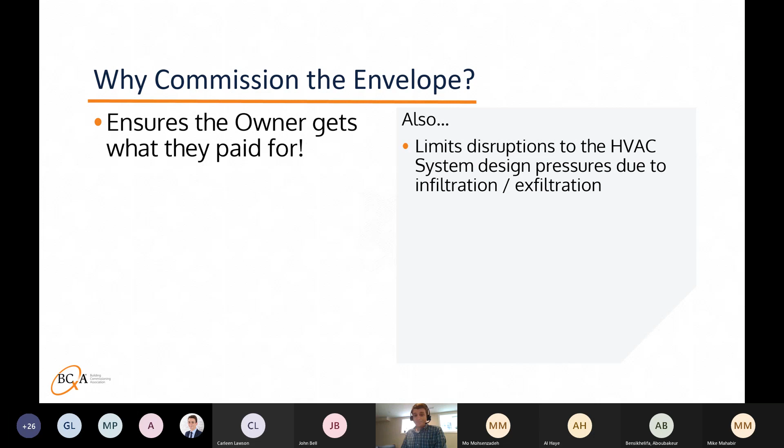Other considerations: if we have a leaky building, it's going to disrupt the HVAC system and their design air pressure relationships. This can be really serious in sensitive applications like hospitals, and even in regular buildings it's problematic. It can lead to condensation, indoor air quality problems, rot of system components, or premature failure. So it's really important to make sure we're getting a tight building, or at least one constructed to the tightness specified for that application.

It can really affect potential energy savings. If your building is leaking significantly more than you planned for, you're going to have to condition a lot more air. This can account for as much as 40% of your target energy savings on a project being affected by a poorly commissioned envelope.

Commissioning limits risks associated with construction defects, and it's important to note this is both for the owner and the contractor. With envelope systems, a lot of our defects relate to concealed components such as insulation or the air barrier. So if you're not catching those until the end of the project, it can be incredibly costly to go back and correct it. From an owner's perspective, it makes sense to catch these up front and make sure they get fixed.

And finally, really where we're seeing a lot of growth in building envelope is because it's a way to earn credits under LEED, specifically LEED version 4 that's been introduced over the past few years.

This is a good and bad thing, in my opinion. It's good because it really shines a spotlight on this area of benefit for a project. It can be bad too, because when people think about LEED, they're often thinking about the minimum amount of effort needed to get those 2 points they can achieve, and not always thinking about how to implement the best possible commissioning process.

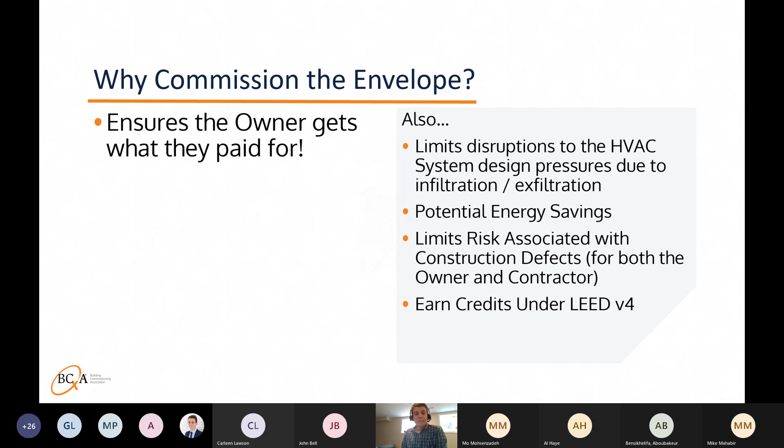When we talk about the process, one thing we want to think about is the best way to achieve these goals and save valuable time and money during construction. What we really want to do is start commissioning the envelope as early as possible. If we start late, the process can still assist with identifying and correcting mistakes via mock-up installations or early in-situ installations and construction review on site. However, it's better to catch mistakes during design and fix them before they ever make it to constructed assemblies - this saves headaches for all parties.

In an ideal world, the building envelope commissioning consultant will be brought in during the pre-design process, while the basis of design and owner's project requirements are being developed.

Unfortunately, this doesn't happen as often as it should, but regardless of when we're brought in, we have to be flexible and ensure we support our clients' needs, even if it limits our effectiveness somewhat if we're brought in later in the process. We'll talk about that in the next few slides.

When we think about the building envelope commissioning process, it really tracks through the entire construction process. There are certain parts where we're much more involved than others. Ideally, we're brought in right at the beginning, at pre-design and design development. In practice, we're often brought in closer to when the design team is putting together construction documents.

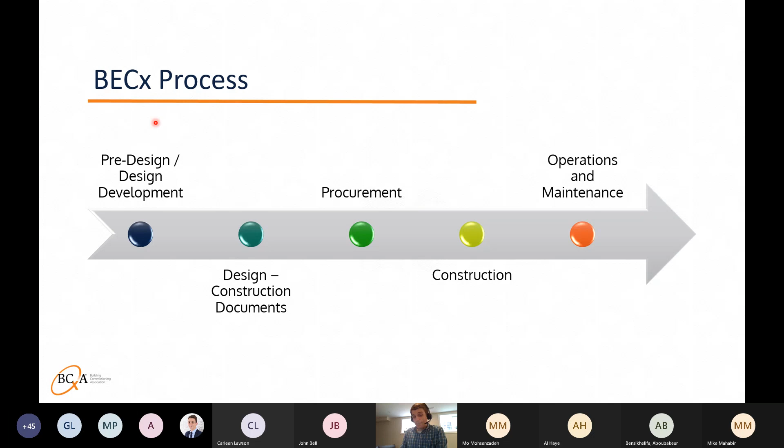We'll talk through the ideal process in the next few slides, but understanding there's a little bit of flexibility, right? As with all things in life, the ideal situation doesn't always happen. Our plan doesn't always match reality. With that said, it's easier to navigate the bumpiness of real life construction situations if we head in with a good plan and process in place, even when acknowledging we need to be flexible.

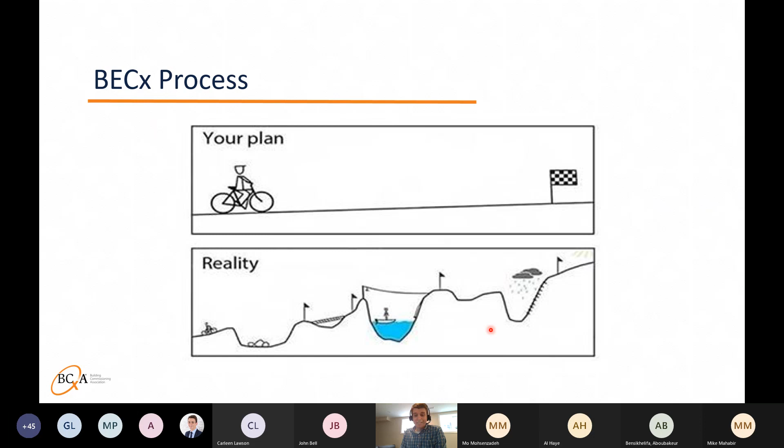Starting in pre-design and design development, the real benefit of having your building envelope commissioning team in place at this stage is it allows us to be involved in the development of the owner's project requirements.

This is a document that needs to be put in place early in the process. I'm sure you all have experience with OPR, and I'm sure you have experience with really good OPR documents and really bad OPR documents. You can have both, right?

Some of them are put in place the way they're supposed to at the beginning of the project and really inform everything else that's done. Sometimes they're retroactive documents done to check a box at the end of the job and didn't really control anything. They're just kind of put together.

But we do recommend, if at all possible, that we hold a working meeting in order to draft the OPR. Again, I'm talking specifically from an envelope perspective. Obviously there's a lot more that goes into the OPR.

This document defines requirements and specific performance targets for the project. It's important to consider budgets while putting it together. What are the owner's priorities? Do they want to meet minimum legislated requirements, or exceed them? If so, by how much? And what is the cost to do so? There are a lot of considerations to be thinking about.

It's also a living document that will be updated as the project progresses. If we identify some things during the design stage that need to be changed, we might decide that we could do this, but it's going to be significantly more expensive, or we can get similar performance if we modify it this way. So we want to have some level of flexibility in it.

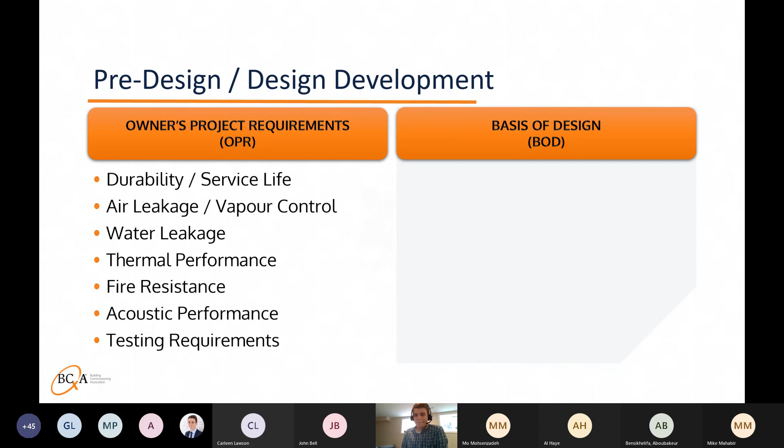Once you put your owner's project requirements together, you develop your basis of design document. This is essentially a detailed description of proposed systems, assemblies, and materials, illustrating how they can comply with the OPR. When putting together your basis of design, you want to consider maintenance requirements for the systems, especially if doing this in conjunction with life cycle costing analysis for the project.

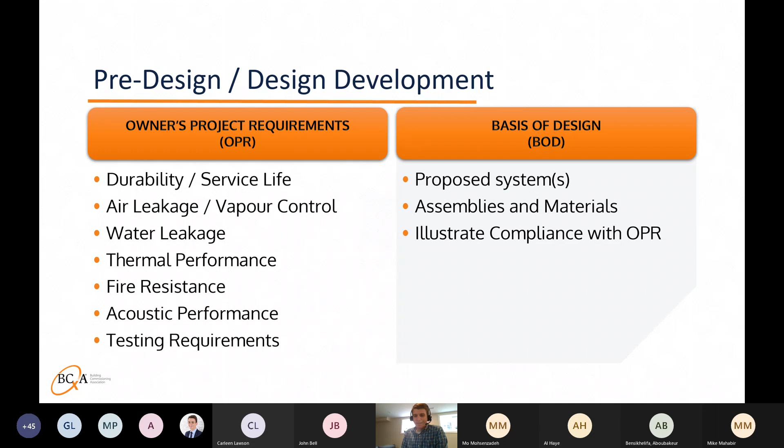In a nutshell, the OPR defines the performance targets for the building envelope, while the BOD provides the plan for how to meet these targets.

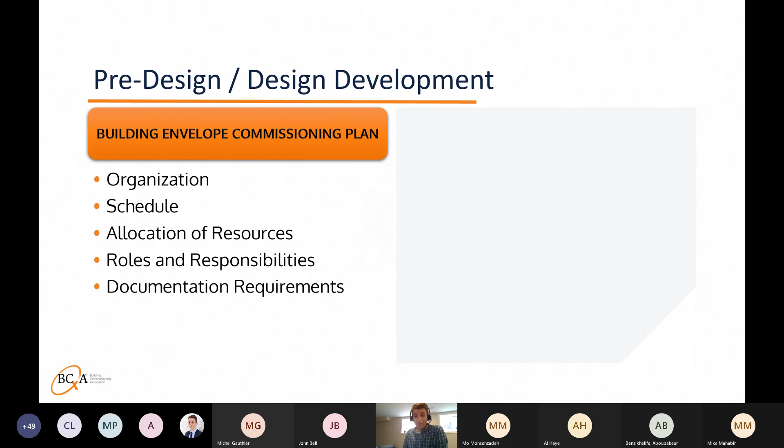Once the OPR and BOD have been developed, or in the case that we are brought in later and have reviewed and understand these documents, it's our job as the building envelope commissioning professional to create a project-specific building envelope commissioning plan that overviews the schedule and organization of commissioning activities. It should talk about how internal resources will be allocated to meet project requirements, and overview the roles and responsibilities of project team members, documentation, and documentation requirements, including who has responsibility for preparation of each document.

Okay, so that basically takes us out of the pre-design phase and brings us into design development and construction documents.

During this stage, the commissioning specification sections need to be developed. Typically we will have both front-end sections dedicated to commissioning procedures, as well as notes in the technical sections for component-specific commissioning requirements.

Typically, all of our envelope elements are covered under Division 7 and Division 8, with a few isolated exceptions.

Depending on our specific scope for a project, we may be preparing some of these specifications, or we may be in a largely review role. In either case, we need to have oversight of the specifications so that we can suggest items to be included.

Things we would want to make sure are discussed include testing requirements, shop drawing submittals, what's required for shop drawings, what's required for other material submittals, and project mock-ups for each individual assembly.

When are they required? Are they on site? Are they in factory? Are they part of the actual finished building enclosure that can be kept if the mock-up passes testing, etc.? What about manufacturer site visits?

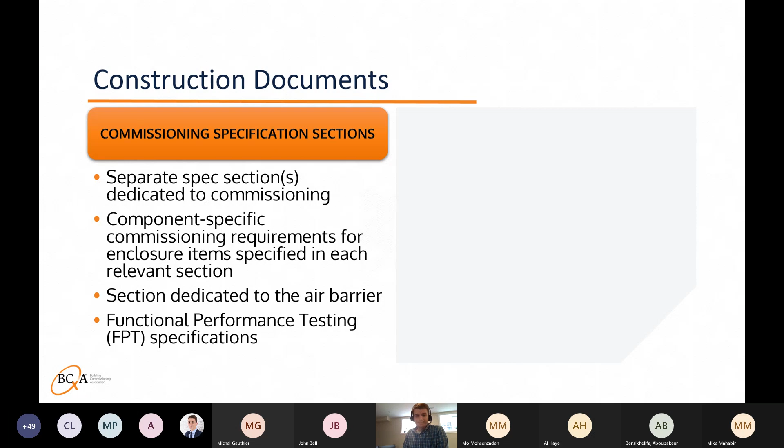So once we've assisted with that, we'll do our building envelope design review, which includes review of all the relevant specification sections, and we want to review them for compliance with the OPR.

And then we move on to drawing review. Transition details are really important and that's where we're going to focus a lot of our attention when we're doing a design review. So this process is going to include review of the design drawings.

And then once we've moved on after the procurement phase, it's also going to include review of relevant shop drawing submittals. We're going to review all details for continuity of the thermal barrier and air barrier, and again, this is most important at the transition between assemblies. And we want to make sure that the detail is constructible.

And especially when we get to the shop drawing review stage, we want to make sure it's clearly identified which trade is responsible for the item, like a transition membrane. We'll see things like a window shop drawing that shows the transition membrane and says transition membrane by others.

And you can go to the cladding shop drawing for that cladding system adjacent to the window, and you look at theirs and they have that membrane identified and it says by others again. So we want to, as the person reviewing the drawings, identify that and call it out to the contractor and say you've got to coordinate between your trades whose responsibility this is.

And then we also have to figure out the sequencing for that. What we don't want is a situation where you've got this transition membrane that maybe the cladding trade decided they're responsible to put on, but the windows aren't going to happen until weeks after the cladding is completed, and that transition membrane is just sticking there, flapping in the breeze.

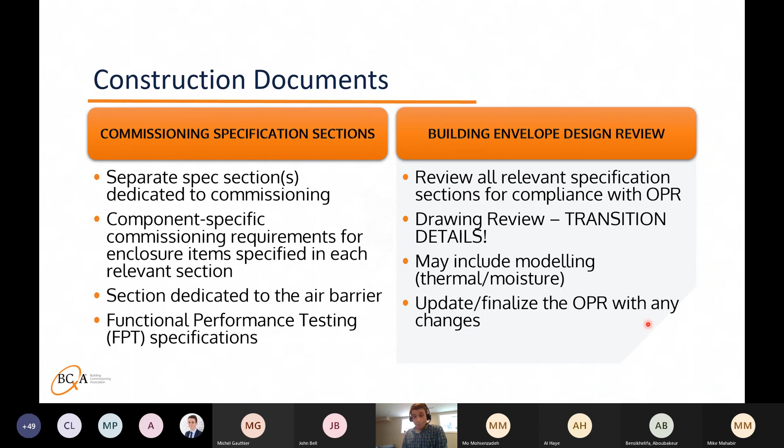There might be some modeling that happens around the design stage, whether that's by us or by others for us to review. And then as we do the design review, if any changes are required, we might want to finalize the OPR with any changes that were included.

As I mentioned before, sometimes our scope includes preparation of these commissioning sections, and sometimes they're created by the design team with our responsibility to review and provide comment. And in either case, we really want to make sure that the BECx requirements are clearly defined and that we are able to get buy-in from the contractor.

So this is especially critical when it comes to the functional performance testing requirements. As this is an unfamiliar service to a lot of owners, they often don't have a firm idea of what they want from the functional performance tests and which are most appropriate for their building.

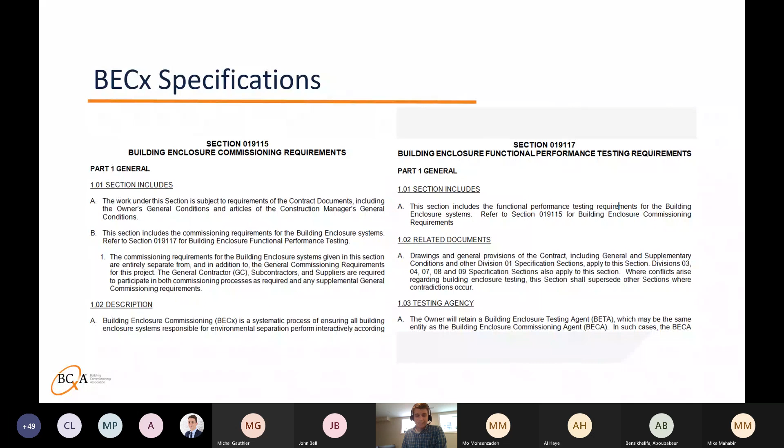So again, it's important for us to talk this out early in the process, really at the time of the OPR development if possible. That way we can ensure that an appropriate list of applicable tests can be specified. If you're doing it too late in the process, it can add cost and create confusion between the design team and the contractor.

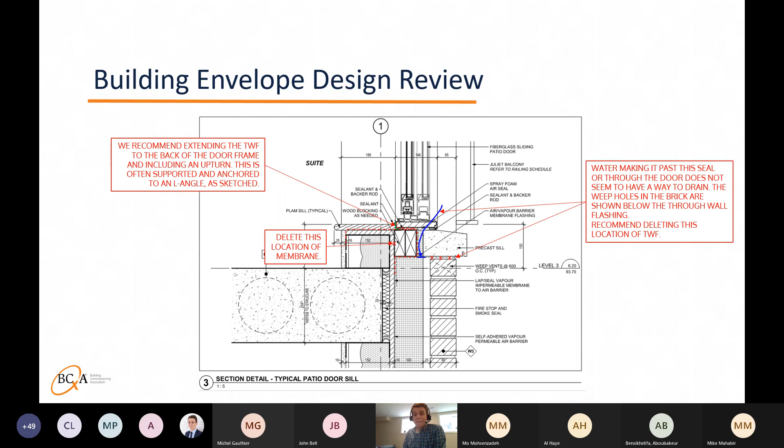If at all possible, it's good to do a review at about the 75% design development stage. By then, they're usually far enough along that there are well-developed building envelope details for us to look at. Sometimes prior to that, we get drawing sets with so little detail in terms of how systems tie together that there's really very little for us to comment on. So ultimately 75% is a pretty good stage, it gives us a chance to get in still really early in the design, get our feedback in, before we're talking about IFC drawings.

Once we've done the design review, we move into construction. The first real task in the construction phase is the startup meeting. This meeting is always important, but it's doubly so if the contractor wasn't involved during the design phase, as we need to transfer all information regarding commissioning and requirements for testing and documentation to the contractor.

When we're doing building envelope commissioning, we find there are many requirements for the contractor to do QA and QC that they're not likely accustomed to. So it's important to review their plan and make sure they've assigned individuals to oversee each trade, and that those trades have proper QA/QC procedures in place. One way we can help is that it's often included in our scope to prepare QC checklists for each envelope, a simple way for them to come to site with a daily checklist, making sure they're thinking about those things at the start of each workday.

Establishing clear roles is critical. The sooner we do this in a project's process, the better for ensuring a smooth commissioning project.

Once we get into construction, there are a few things we do on a regular basis, including periodic site review. The extent of our site review is really variable project to project, and typically fairly limited when we're the building envelope commissioning consultants. It's more a high-level review to make sure there aren't any large-scale issues propagating through the construction.

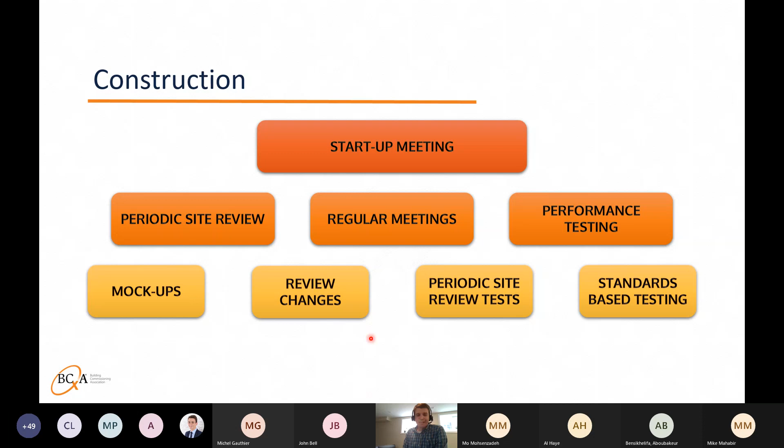Mock-ups are really important, not just for us, but they're a great opportunity for the contractors to get a test run in with their QA QC plan. And if there are any significant changes to the design during construction, we need to be a part of that and make sure we understand and can communicate that well to the construction team.

So, performance testing. This is, I think, in a lot of ways what people who aren't familiar with building envelope testing or commissioning will be really interested in - what types of tests we can do to verify performance of the windows, and the short answer is, of the envelope, not just the windows. There are a lot of things we can do, a lot of different types of tests, and some of them I'm fairly familiar with.

Some of them listed here, such as blast testing or impact testing, I haven't done on any project that I've worked on. And really, again, it's going to be project specific.

So we really need to determine with the team what performance criteria they will be including in the commissioning process. I would say at a minimum, we're always really concerned about air leakage, water penetration, and thermal performance. The other ones are kind of on a case-by-case basis - it's going to depend on the available budget, the owner priorities, the type of systems.

So in the next few slides, I'm going to go over some examples of various tests that can be performed. This is obviously just a sampling of the tests that are available out there. I've tried to include a lot of the most common ones that we recommend on a lot of jobs, and I'll give a little bit of detail on how each test is performed and what we're trying to detect with it. But the intent of this presentation isn't to get too into the weeds with that.

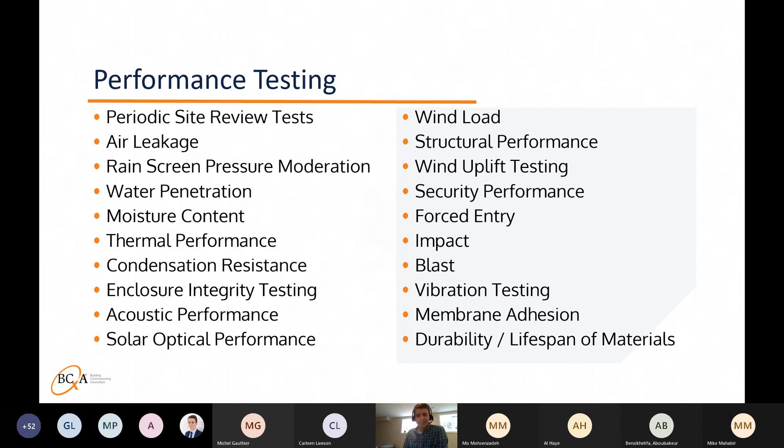Yeah, so one of the tests that we do on a lot of our projects, or that we recommend anyway, is ASTM E1186, which is essentially an IR scan of the building envelope. The intent of this scan would be to identify kind of low-hanging fruit in terms of areas where you might have issues with thermal bridging or air leakage.

Typically, the test would be scheduled for a cold winter's evening when you have a delta T - a difference in temperature between the interior and exterior - of at least 20 degrees Celsius. You're going to get your best results that way.

And then you want to pressurize the building, which involves closing all the windows and doors, closing any other intakes if possible, and then trying to set the HVAC systems to be supplying as much air as possible and exhausting as little as possible, so that you've created a pressurized enclosure - where air has other opportunities to escape, you can pick it up on the scans.

I've shown some examples of photos and conditions you might see from an IR scan like this. This first photo shows evidence of air leakage around these fixed IGUs in a curtain wall application. It looks like there must be something going on with the seal, because all along this horizontal mullion, you see these little fingers of air that appear to be escaping around it.

This corner mullion at a curtain wall here looks like it's at a higher temperature than everything else, which might suggest it wasn't insulated properly. You'll see this in a lot of buildings that have poor insulation over the slab edge and over the edge of shear walls, so you see these really defined thermal bridges at the floor slab locations.

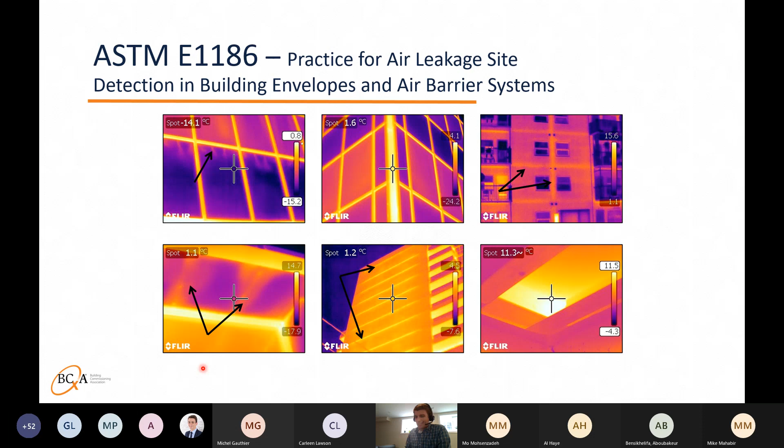If they're easily diagnosable just based on the images during the scan, you can say what it is and if there's options for repair. Otherwise, you might need to recommend additional testing to drill down on what's going on.

Another test you can do is E2359. This is basically a pull test for EIFS, making sure you've got proper adhesion of your insulation panel to the substrate. Essentially, you're taking a piece of plywood, adhering it to a cutout section of your EIFS wall, and you have this calibrated pull rack that's going to pull it at a specified load to failure.

Once you've removed it, you can also look at how the adhesive was actually applied. Typically with an EIFS application, you want vertical ribbons of adhesive. Here, it looks like they just did a minimal spot application. And here's an example of the same test being done on a mechanically fastened system.

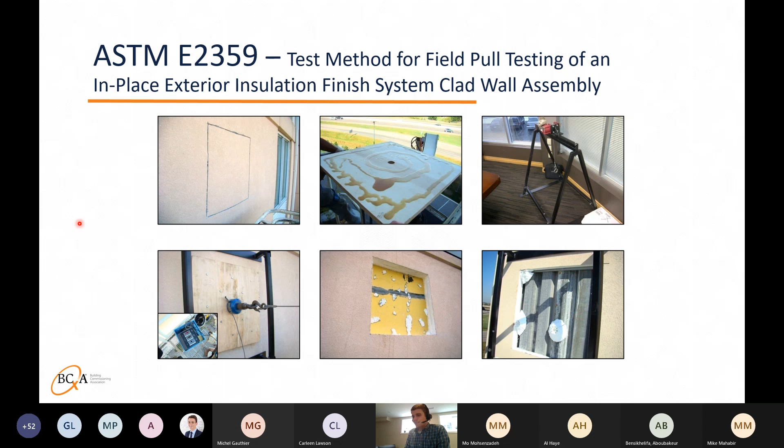ASTM C1153, this is a roof IR scan. One thing we try to educate our clients about is that they often want us to scan the roof and the walls at the same time. But in reality, as I mentioned with the wall scan, you want to do that in the winter when you have a really high delta T between the interior and exterior.

The roof scan you actually want to do in the summertime, on a day when it's really sunny and you get a high solar load on the roof throughout the day. Ultimately you're looking for areas of wet insulation, which hold a lot more energy from the sun and release that heat energy slower than the dry areas. So if you have a nice hot day and come in after dusk to do the scan, you'll see the reflection of that heat radiating to the night sky.

You're looking for defined geometric shapes which follow the insulation panels in the roof below, and you can pretty clearly see where you may have issues with leaks because the insulation panels are clearly saturated with water. We'll also see evidence of thermal bridging through mechanical fasteners in the roof system, and depending on how it's designed, that might be expected, or it might indicate they weren't installed properly.

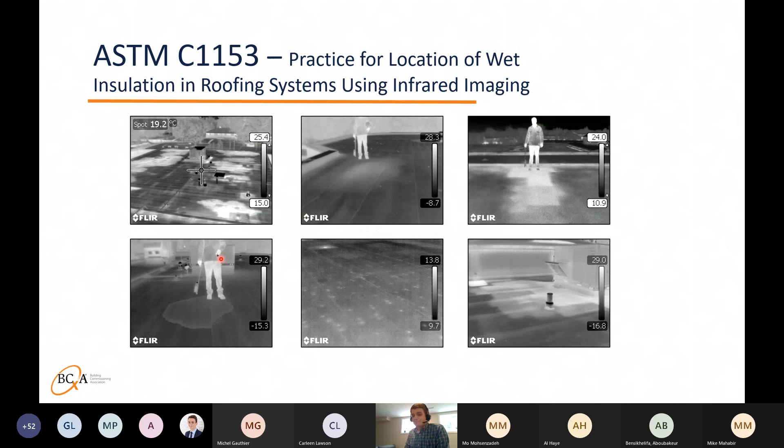A common test we do a lot while on regular site visits is ASTM C1193, what we call the hand pull tab test for sealants. The intent of this test is to confirm that your sealant is bonded well to your substrate.

We've got this diagram from Dow Corning's installation manual showing how the test is completed. Basically, you want to cut it off as cleanly as possible from the substrate and get about a 2-inch sample, then pull that sample at a 90-degree angle to your substrate.

You pull it to its maximum elongation and then even beyond, trying to pull it right to failure. If the sealant is passing, that's because it fails cohesively within the material before it starts to fail adhesively and pull off the substrate. That shows you whether your substrate was prepared properly so you can get that good bite. If it's failing, you might have had a dirty or wet substrate.

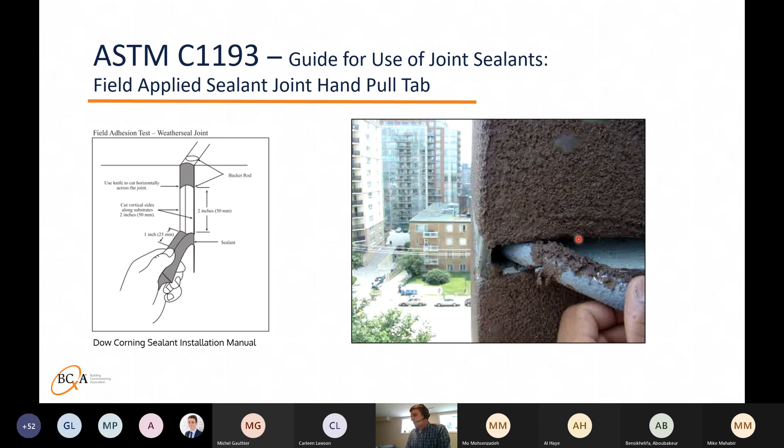We have this example here of an EIFS system, where you can see they've got finish coat on the backer rod, meaning the finish coat was clearly applied before the sealant. When you do that, the finish coat doesn't have a very good bond strength to the base coat below, so your sealant is going to pull that finish coat off and fail quicker than it would if it was properly attached to the base coat.

ASTM E1105 is another test we recommend on a lot of our projects. It's a really good test for window water penetration, basically making sure windows hit their specified performance targets. The way this test is done, you get an enclosure that you pressurize on the inside of the window, with pressure provided uniformly for part of the test and cyclically for other parts, while the window is consistently sprayed by a calibrated spray rack on the exterior. As the window is wetted and the test runs, you're looking for it to complete the entire test without any water coming in.

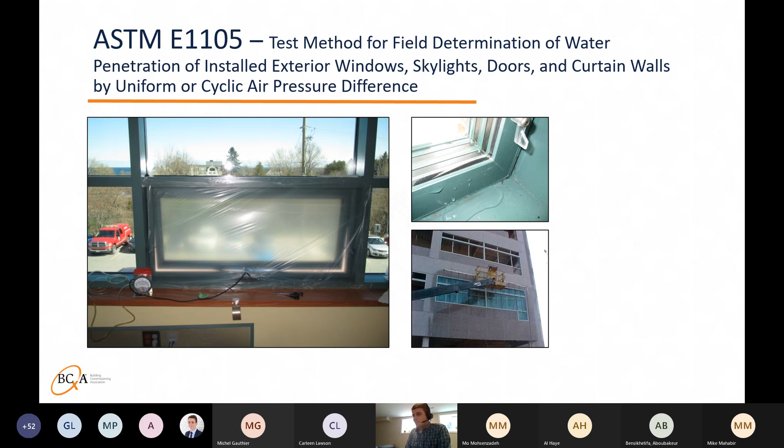If you do see water coming in, that's a failed test. The next step is to diagnose the problem and figure out whether it was an installation issue, or whether the window system selected simply can't meet the standard. That shouldn't be the case, since you should always check manufacturers' test reports before reaching this stage, but you still have to diagnose it and make sure you can fix it.

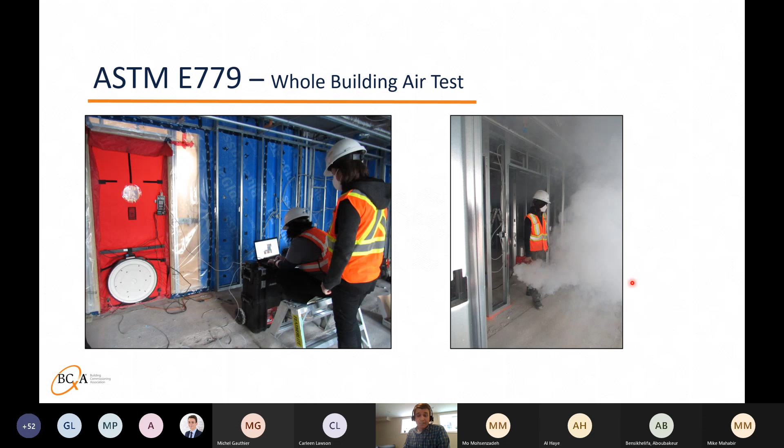When you do the test, if you're really close to passing, maybe just a little below your target, sometimes you can identify where the leak sources are and correct them at this stage. One thing we do to help with that is introduce smoke into the interior of the building while completing the test. Because the blower door is pressurizing the building, that smoke travels towards the areas of leakage, helping you identify them. In some cases, we can even plug those leaks up, rerun the test the same day, and have it pass.

Another window test is AAMA 501.1. I'm not as familiar with this one as the ASTM standard we discussed earlier, but it's more of a dynamic test with a blower fan from the outside rather than a calibrated enclosure on the interior. It's just another way of simulating wind-driven rain.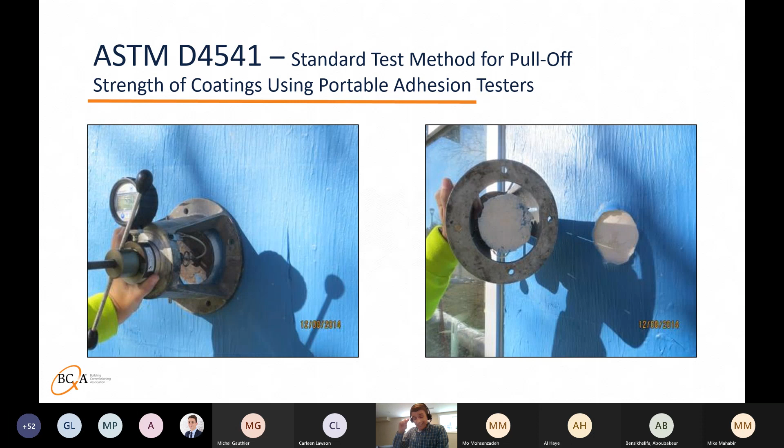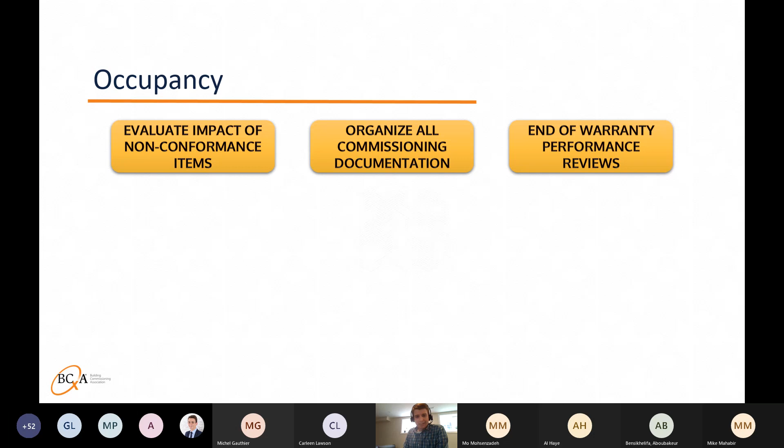All right, so we've done all our testing and gone through the construction phase. Now we're into occupancy, and I'm running a little behind time, so I'll try to go relatively quickly through this. The big task here is putting together our final commissioning report, and a lot of these other items are going to flow into that.

We talked about organizing all commissioning documentation, which is something we want to present usually to the owner with our commissioning report. There may be end-of-warranty-period performance reviews included, and there's almost always some level of operations and maintenance training. So during the training session for MEP systems, we also want to make sure operation and maintenance staff understand how to care for their building envelope systems.

Usually that's a lot simpler than your MEP systems, to be honest, but it's still important to know you've got regular maintenance thresholds for your roof—when you need to get up there and check it, when you should be checking drains, and how to properly clean your cladding so it stays looking good without the cleaning processes affecting performance.

There might also be periodic performance reviews or verification of seasonal performance levels. We talked about roof and wall IR scans being done at different times of year—maybe when your envelope construction finished it wasn't the appropriate time for a wall scan, and you'd want to do that at another point. Some of these tasks might be done by us, by the contractor, or by someone else on the project team, depending on the roles and responsibilities defined in the commissioning plan.

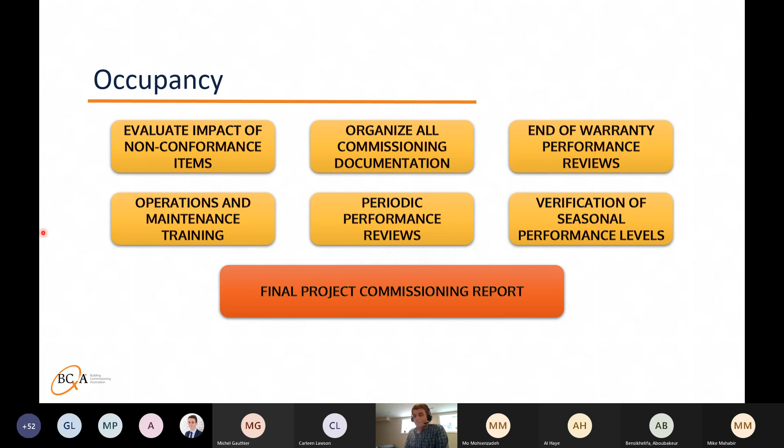All right, just quickly before we end, let's touch on commissioning requirements in LEED v4. There's both the prerequisite, the fundamental commissioning prerequisite, EAP1. Now, if a project, any LEED project has to get all of the prerequisites.

If a team is targeting this but not the enhanced commissioning credit, typically they're not going to bring on an independent commissioning authority because they're not required to. The who here is a qualified member of the design or construction team. They're not supposed to be associated with the project otherwise, but they can be from the same firm. So even if they're doing this, there are some requirements for building envelope commissioning in the sense that they have to consider building envelope performance targets in the OPR and BOD, and they have to have a review of those targets in the OPR BOD as well as within the project design.

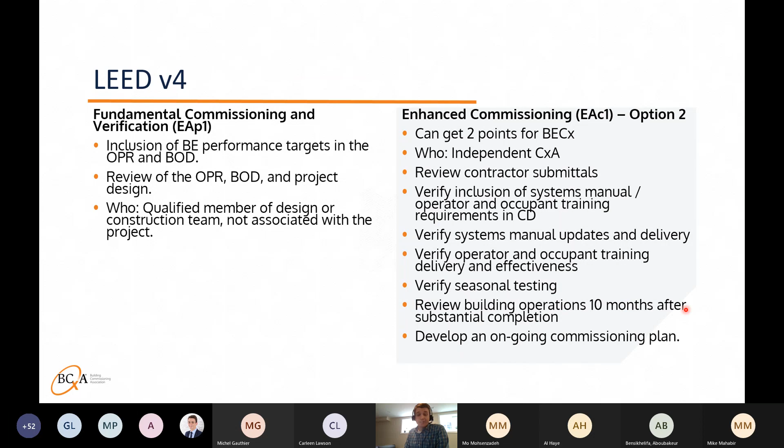Now, once you go to the enhanced commissioning credit, this is typically when you're going to get an independent commissioning authority brought in to do the job. There's an option to get 2 points for building envelope commissioning, under the option 2 compliance path. It includes additional requirements, including review of contractor submittals, verifying that there are envelope maintenance instructions, including the systems manual, and that operator and occupant training requirements are included in the contract documents. You want to verify system manual update and delivery, verify operator and occupant training delivery and effectiveness, verify any seasonal testing requirements, review building operations 10 months after substantial completion, and develop an ongoing commissioning plan.

So I'll provide just a quick summary of what we talked about today. Ultimately, building envelope commissioning benefits all of the project stakeholders. We talked a lot about how it benefits the owners, making sure that they get what they paid for, but it also benefits the design team, having that dedicated member or dedicated third party reviewing their design and providing input where they might be able to improve it. As well as for contractors, again, catching problems early before they become really costly items to correct.

We recommend starting the process as early as possible to take advantage of design review and getting those recommendations to the design team as soon as possible so that they can change things before they propagate too far into the design. You want to determine the desired level of testing that is appropriate for a project, and again, the earlier you can do that, the better and the more smoothly it's going to run. And then as we noted, there is an available 2 points under credit EAC1, Enhanced Commissioning, in LEED v4.